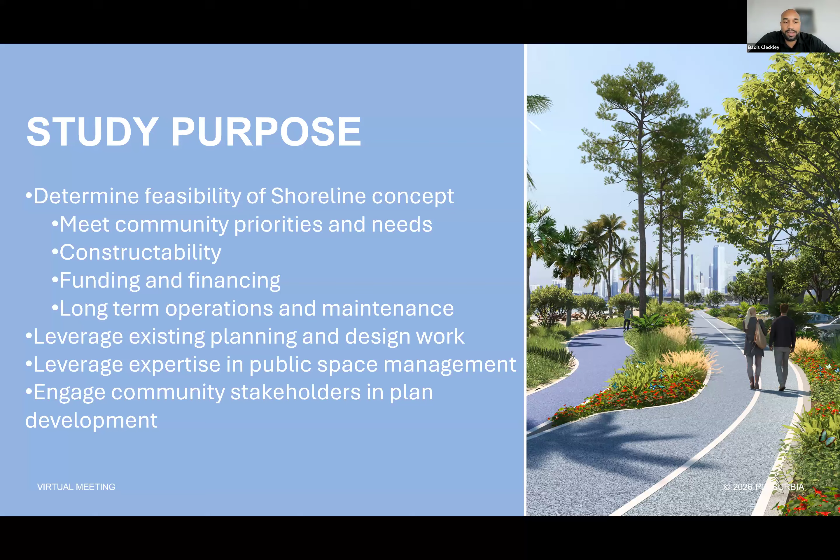And then there's been a lot of work that has been conducted to this point. Miami-Dade County, the Department of Transportation and Public Works has done a lot of analysis and corridor planning and design. And as we move forward, we want to leverage the previous work that has happened in the past and ensure that we really develop a robust, comprehensive, and impactful project for the Rickenbacker corridor that meets the desires of all of our stakeholders.

But also, this is a fantastic opportunity to ensure that we are moving cars and people in the most efficient way possible, focus on safety, mobility, access, and then also having this corridor really solve some of the resiliency challenges that we have for not only the visitors, but also the residents of Key Biscayne.

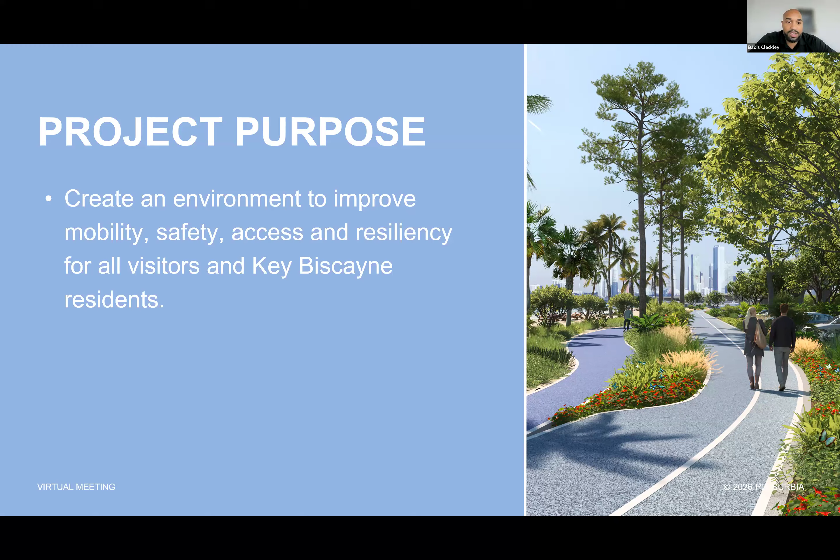Simply put, we have an opportunity through this design to figure out a better way to move people and vehicles. And one way is, as you'll see through the design, to figure out having a better direct access, a connection from the mainland to the village of Key Biscayne, and then repurpose the existing infrastructure to be able to move pedestrians and cyclists in a more efficient manner.

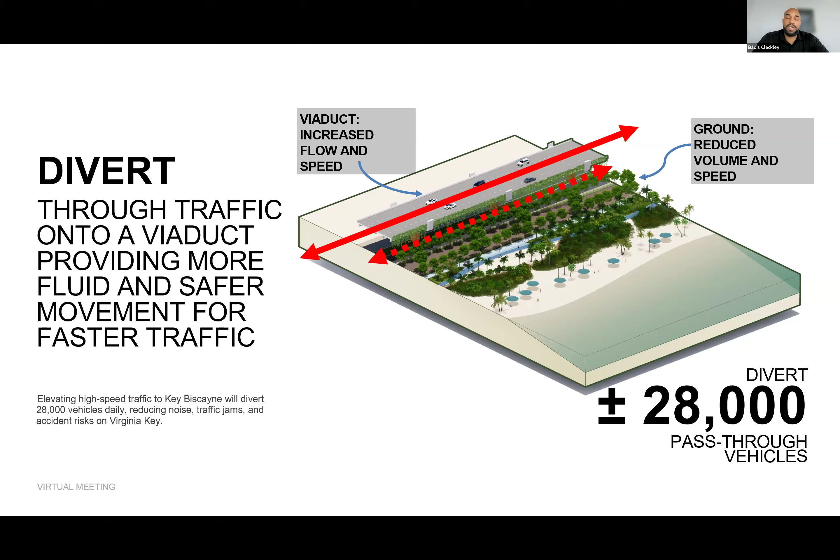At the same time providing those direct connections to future development, as well as being able to handle the traffic demand that will occur along the corridor as there's pending development for Marine Stadium, Seaquarium, and the other existing destinations that people travel to on a consistent basis. So this is a way to move traffic in a quicker and more efficient manner, but at the same time provide those pedestrian and bicycle connections.

But lastly, one of the opportunities we have is, while we're redesigning the infrastructure, to reclaim more of the beachfront and design this corridor in a manner where we can have an actual beach that is a part of the city of Miami. And that's the exciting opportunity that we have.

The beachfront will also provide pedestrian and bicycle infrastructure that will allow for not only more mobility to occur, but also safer access to these amenities as we move forward. By doing so, we anticipate having an additional 160% of public space to be reclaimed and repurposed for a higher and better use.

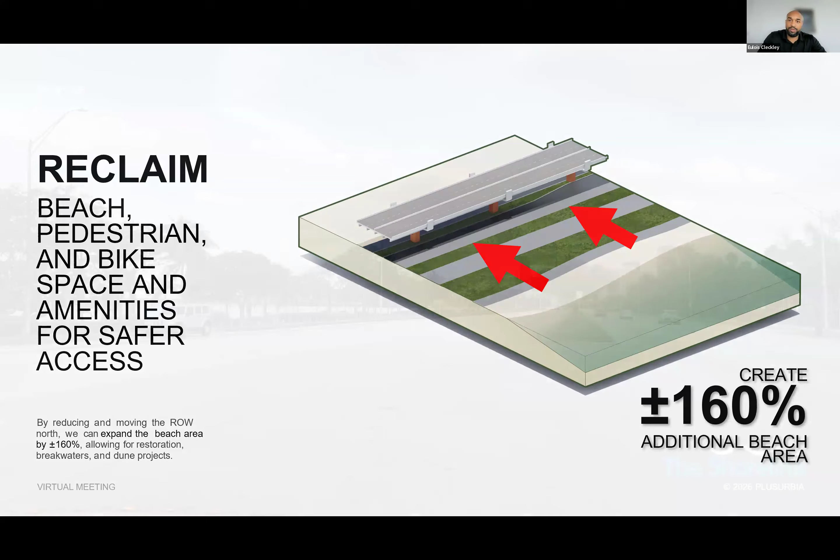So that's just a brief overview and reset of where we are and the reason why this engagement has occurred. What you'll see throughout the remainder of the slides is an update about the information that we've been able to glean from some of the technical evaluations and data collection at this point, and how that's being fed into future design for not only the Rickenbacker, but also providing those direct connections to other destinations, as well as the connection points to existing and future bridges that are being contemplated by the county to be redeveloped. So that being said, I will turn it over at this point to Javier Manso from HDR, who will go through some of the high-level aspects of what we learned through our technical assessment report.

Thank you, Eulois. The one thing we want to cover now is to go over the technical assessment that we've done so far, more of a high-level evaluation of data that we have been able to document, existing data collection, and then some of the constraints that we have identified from an engineering perspective. Next slide.

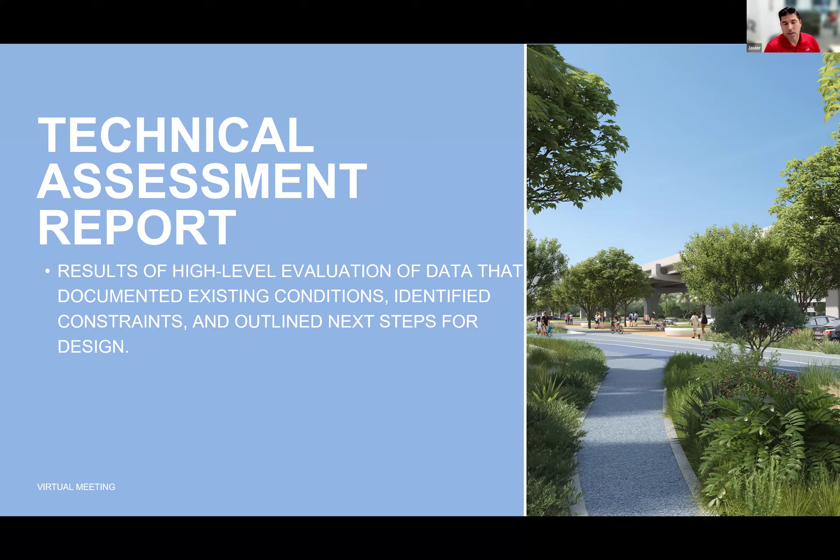One of the key things we looked at is existing infrastructure along the corridor, including a large-diameter 102-inch sewer line that comes from Miami under the bay, crosses Virginia Key, and goes all the way up to the water treatment plant. That large sewer line cannot be relocated and will be a backbone of the concepts we've been developing, to make sure we don't impact or conflict with that pipe.

Looking at traffic, this is the sole access to Key Biscayne and a critical emergency evacuation route. During special events, there are traffic spikes getting to and from the Key that reduce travel speeds to destinations like Marine Stadium, Seaquarium, and Crandon Park Marina.

There are two main bridges within our project limits. The Powell Bridge on the west side will not be impacted. The Bear Cut Bridge on the east side is currently being studied by the county for replacement, and we've been working with the county to make sure the concept we're developing is compatible with that bridge replacement.

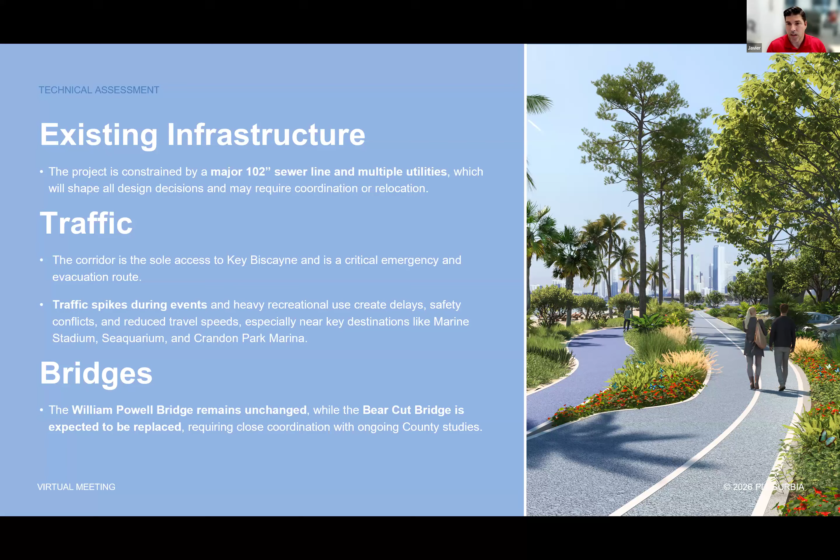Drainage is also going to be a key component. This is a highly regulated coastal environmental area, so permitting and identifying the required permits for this type of project is important, and that's what we'll work on at the next stage. The proposed improvements, as Eulois presented, try to identify opportunities to reduce the impervious area.

This allows us to consider the Virginia Key beach and coastal conditions, taking into account long-term erosion and sea level rise, and how we can make this part of the corridor as resilient as possible through beach restoration and reclaiming and removing paved asphalt areas.

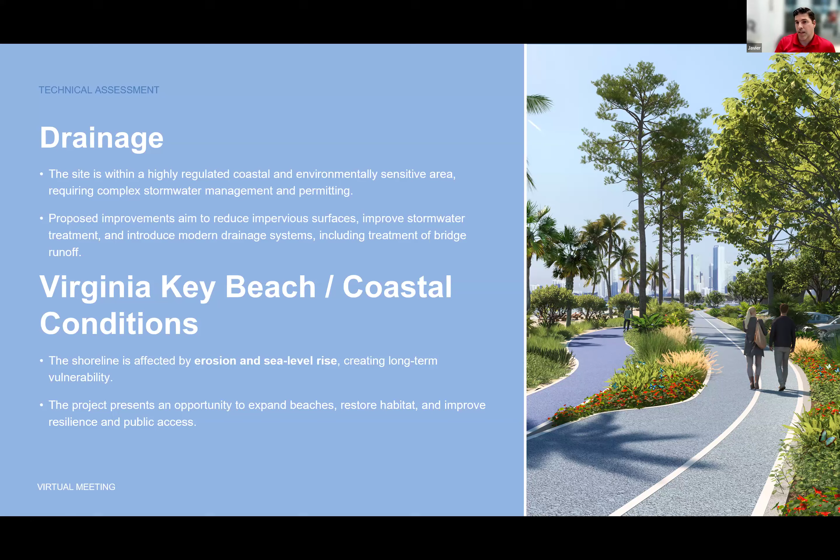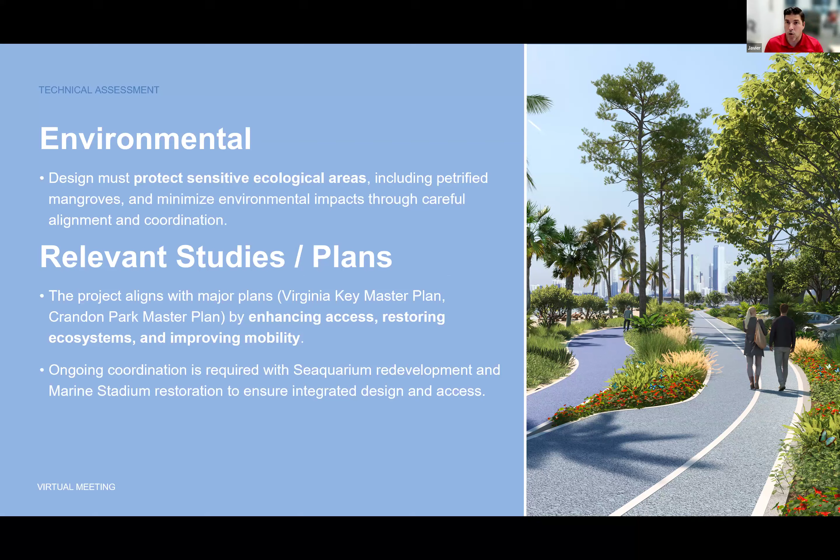On the environmental side, this is a very sensitive ecological area. There are petrified mangroves in Crandon Park that we cannot impact. Some of this is being coordinated with Miami-Dade County, who have identified sensitive areas as part of the Bear Cut Bridge replacement, and we want to stay in sync with their findings as we develop our concept. There are also the Virginia Key Master Plan and the Crandon Park Master Plan, and we're trying to maintain cohesive, in-sync development across all the different ongoing studies along this corridor.

From an initial technical design standpoint, one of the key components we're working on is the Bear Cut Bridge replacement. That's in very early, preliminary environmental study stages by the county, and we're coming in with a concept that is compatible and allows for future development between the two different studies.

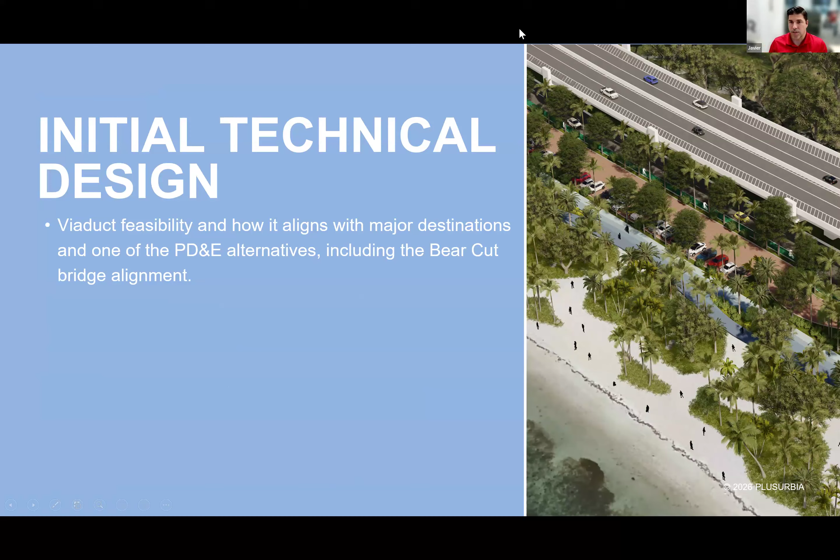I'm going to share my screen and walk you through a concept roll plot that we have developed.

What you see on the screen are two panels. The top panel is what we call the upper roadway, where the viaduct will be located on the corridor, and the bottom panel is the lower roadway, where we turn off the viaduct and can see what the improvements look like at street level.

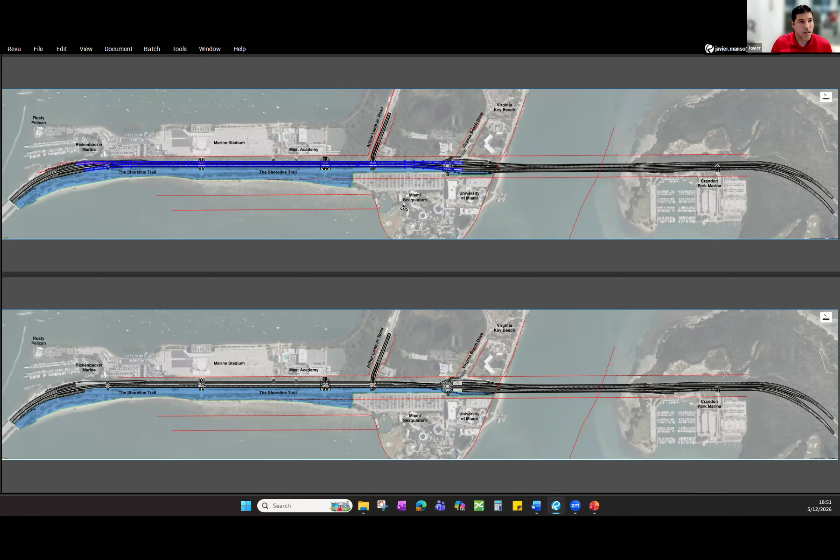Looking from left to right, the Powell Bridge is on the left, and as we move east we're heading towards Crandon Park, with Crandon Park Marina all the way on the right. Key destinations include the Rusty Pelican, Rickenbacker Marina, Marine Stadium, Mast Academy, Arthur Lamb Jr. Road, the Miami Seaquarium, which might be in redevelopment, the University of Miami campus, and Virginia Beach Drive.

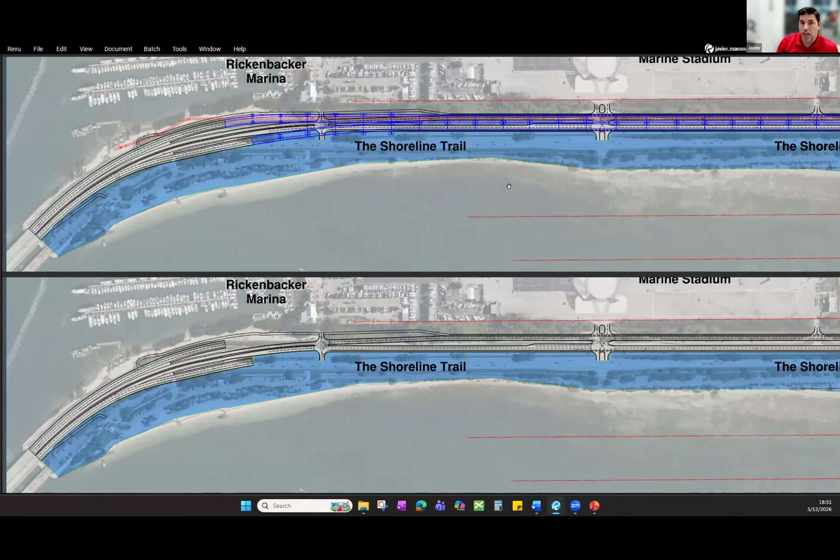As we zoom into the concept, the blue shaded area is what we call the Shoreline Trail, an opportunity for the transformation of the Key based on this concept. One key element was separating the traffic: as you're coming from or going to the Powell Bridge, for the safety of pedestrians and bicyclists, we propose separating bikes and peds on the right side, where they'll peel off on a ramp into the shoreline or come in from the opposite direction.

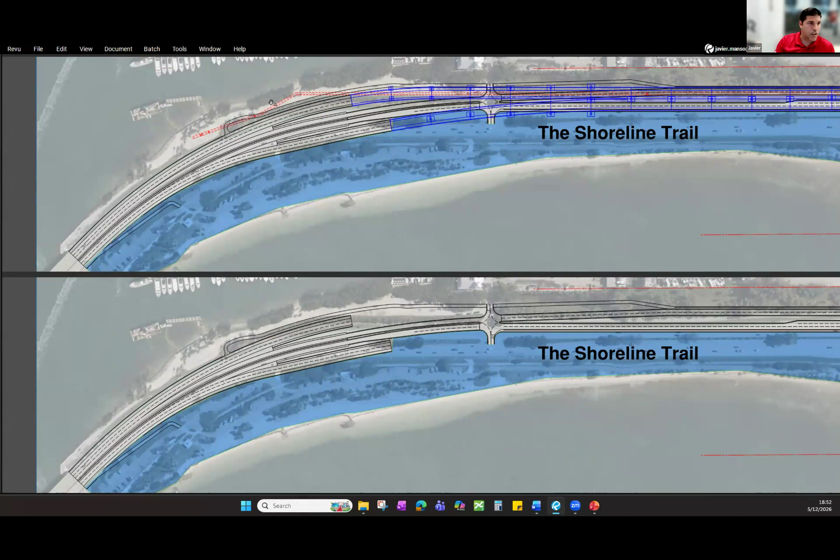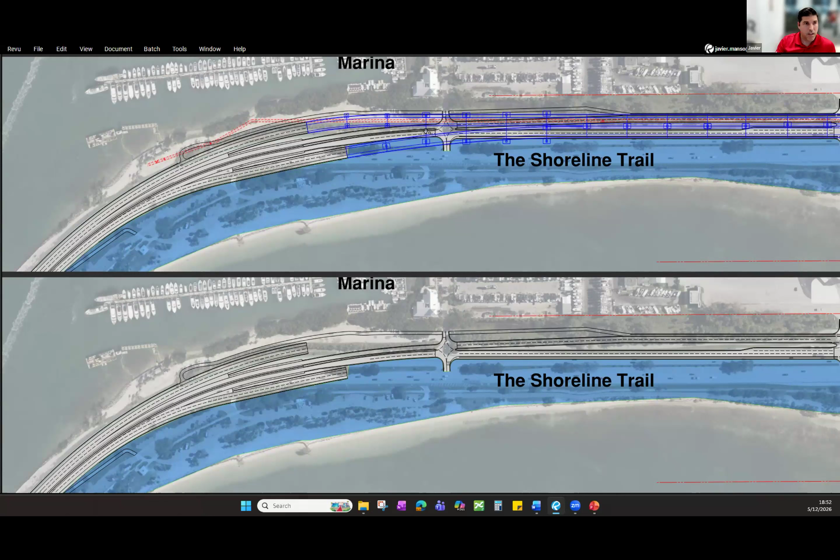Vehicles that would like to go to Virginia Key will go in on the left-hand side, get on and off, and then go to the local road. If you want to continue all the way to Key Biscayne, you continue on the outside on the viaduct above. If we zoom in on the bottom, you can see the lower roadway, and the blue outline on the top panel is the viaduct.

Right now we're showing a preliminary location of piers and columns, so we can identify potential conflicts and design around them. We've also identified the large diameter pipe, a 102-inch sewer pipe shown in red dotted, and we're currently working with the county to verify and locate it exactly so we can design the foundations for the viaduct without impacting or conflicting with it.

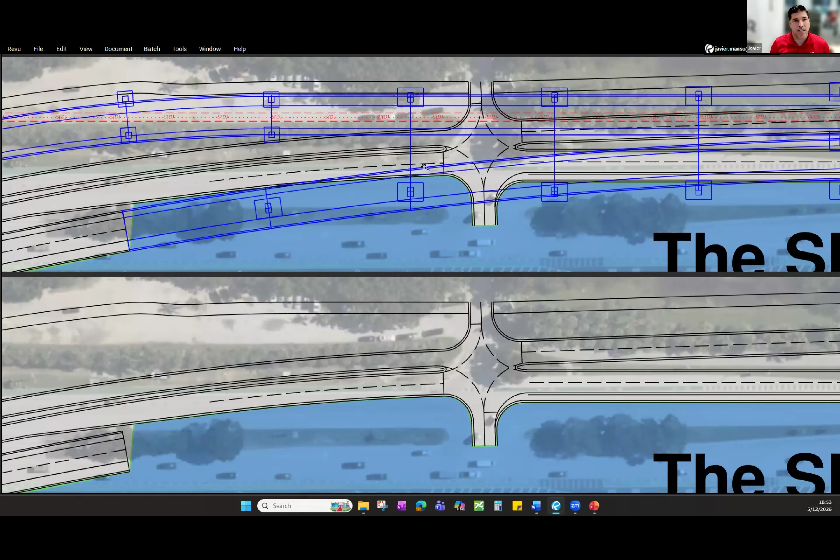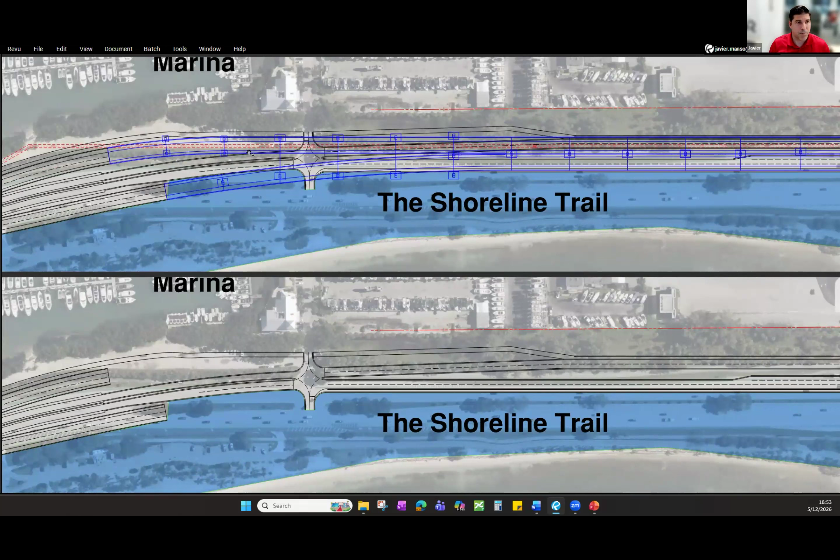As we move forward, the typical section of the road below will become a 4-lane curb and gutter roadway, low speed, 30 miles an hour. The viaduct above will continue the same speed as the Powell Bridge, posted at 45 miles per hour.

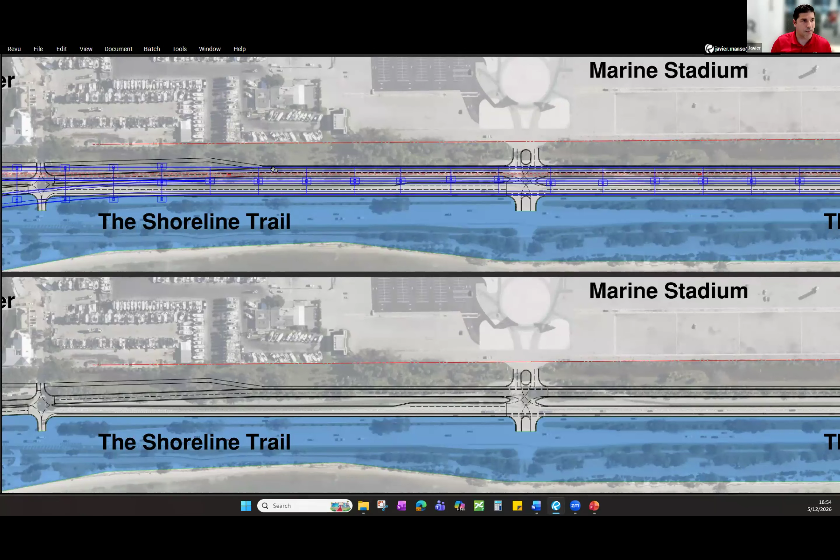As we continue on, at the Marine Stadium there will be a full intersection. The type of intersection and access control has not been fully determined—that can be decided in a later phase of the study, whether it's signalized or non-signalized. That's ongoing coordination with the county. However, the viaduct above would not be in conflict with the Marine Stadium access.

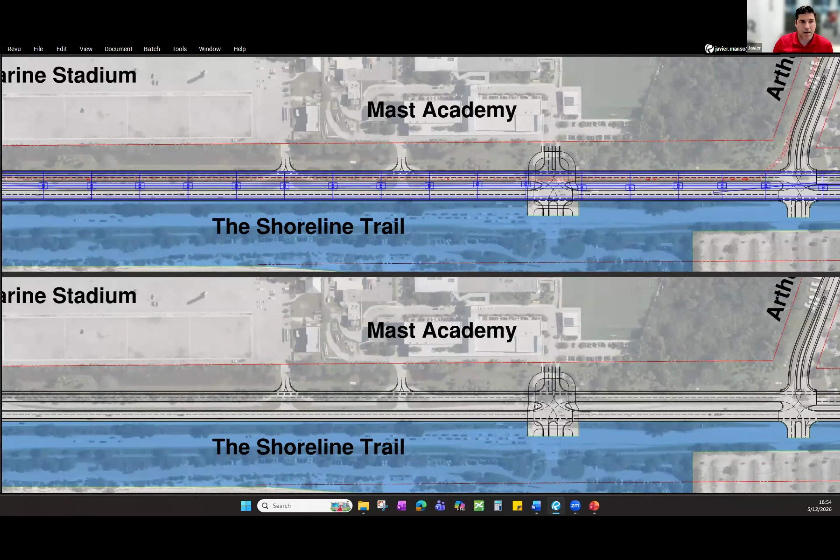So we continue moving east. The same thing with Mast Academy: the viaduct will continue to go over, and the local road will provide access to and from Mast Academy and any potential parking in the area of the Shoreline Trail.

One key component of the Mast Academy discussions with the county is the safety of the students during drop-off and pick-up, making sure we've identified the shortest intersection so students parking on the Shoreline side have a very short crossing distance, with ample, very wide crosswalks so they can cross safely.

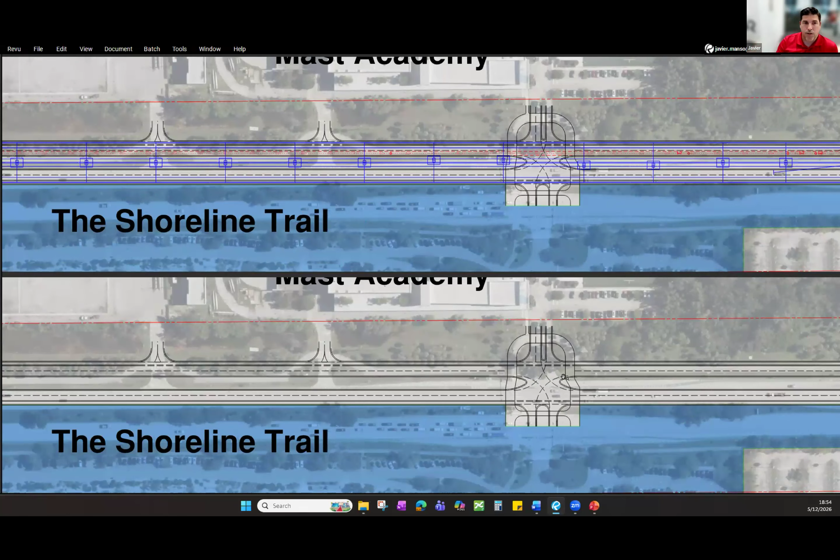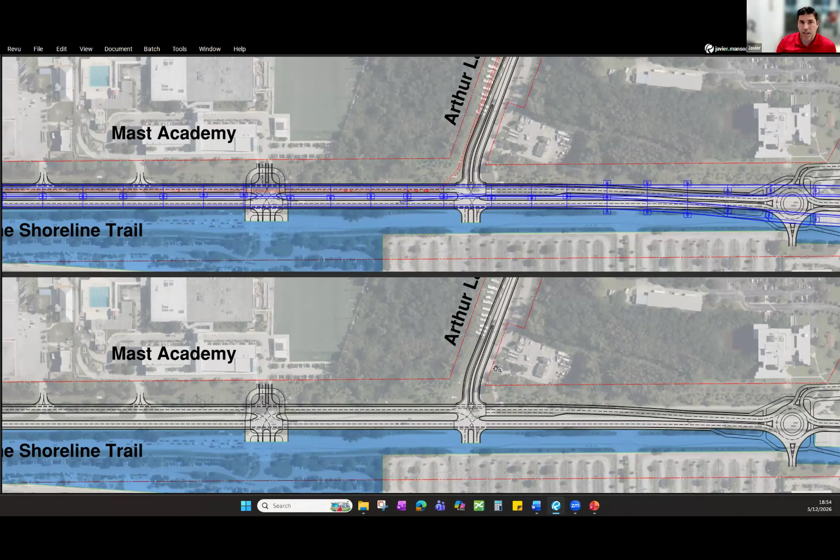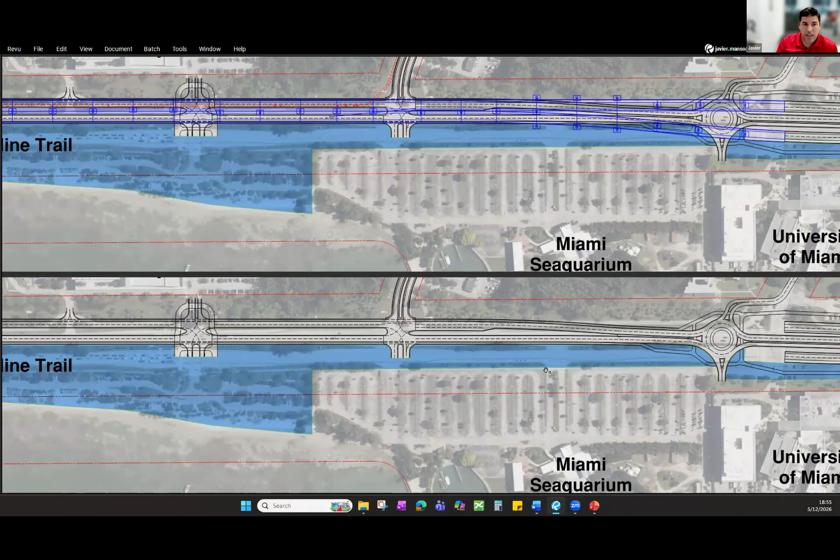Continuing on, at Arthur Lamb, the entrance to the park, the beach, and the mountain bike trails would be reconfigured, introducing additional access to what could be a redevelopment of the Seaquarium property. One key component is making sure all the parking at the Seaquarium is maintained as much as possible—we're trying to stay away from it so it can be maximized for the use of the corridor.

Looking at the top, the location of the potential columns for the viaduct is being designed and positioned so that we're not impacting the parking of the Seaquarium property.

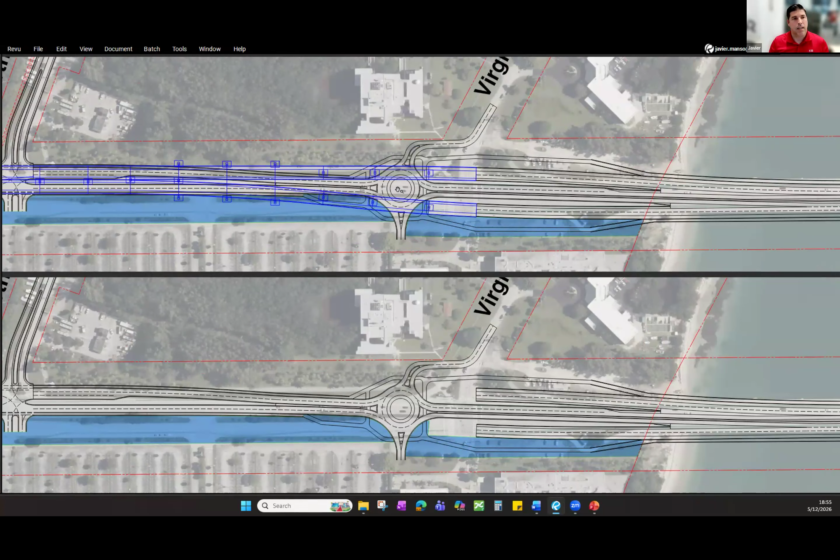As we get closer to Virginia Beach Drive, we do need to relocate that intersection. Right now we're showing it as a roundabout, but it still needs to be fully vetted whether it stays as a roundabout or becomes a full signalized intersection—that is still to be determined.

One key thing here, as we get to the Bear Cut Bridge, is the same approach as on the Powell area: the local road access will come in the middle of the Bear Cut Bridge, and pedestrians and bikes will connect to the outside, eliminating the friction between pedestrians and bikes, just as we did on the Powell Bridge.

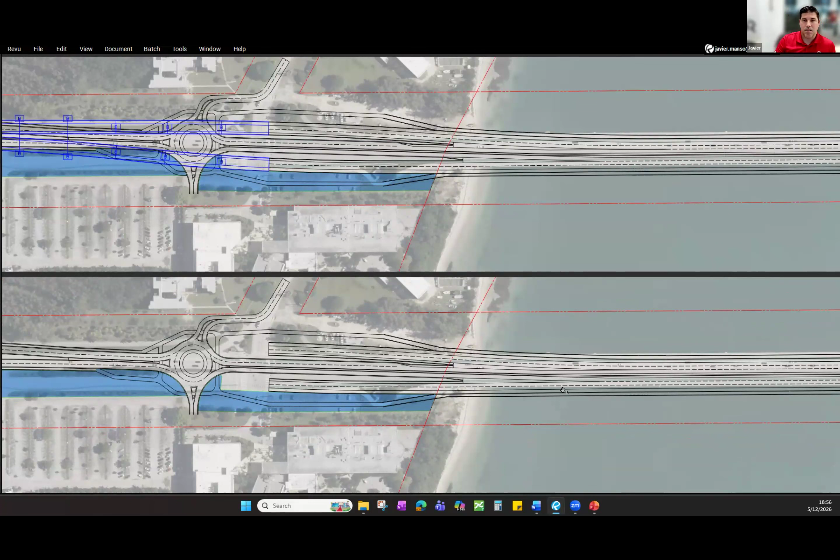The typical section and the limits of the Bear Cut Bridge are still being studied and coordinated with the county to minimize throwaway and maximize compatibility between the two projects, depending on which one comes in first.

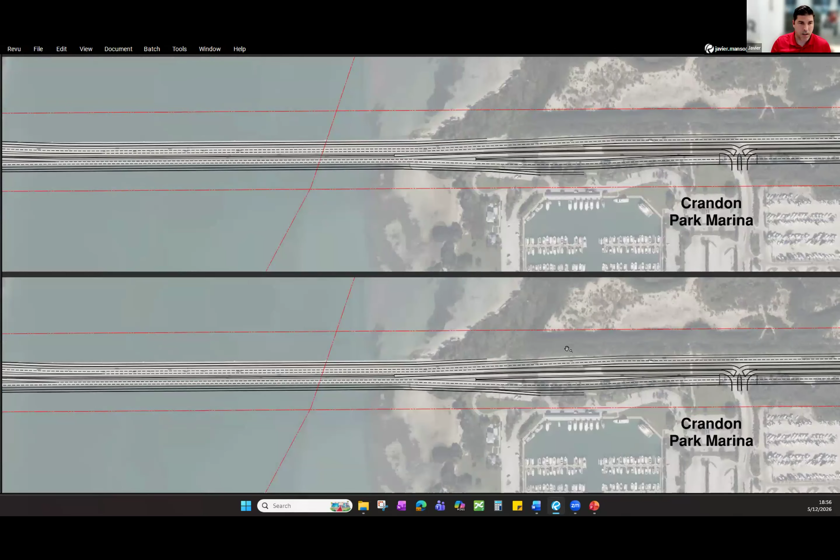As we cut across the Bear Cut, as we said earlier, there is environmental and sensitive land—the Crandon Park master plan area has some petrified mangroves that are protected. So we are maintaining the same limits as the existing bridge on the north side to minimize any impacts to the mangroves.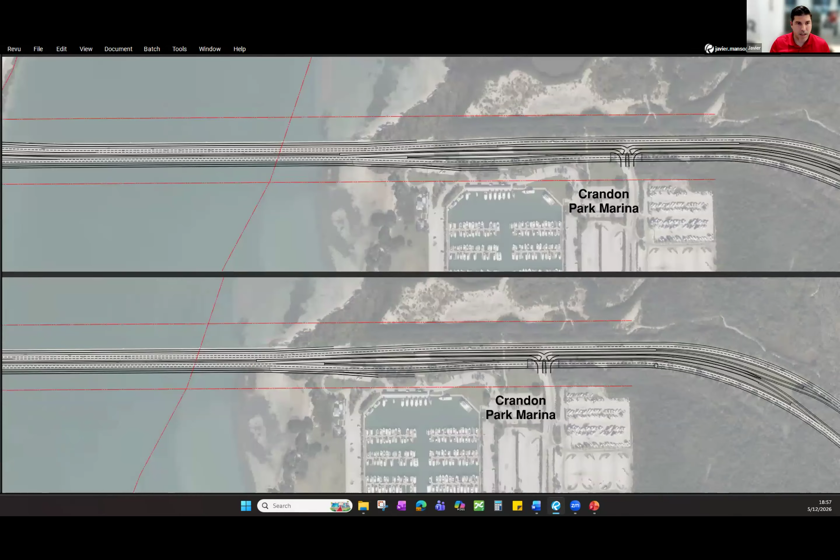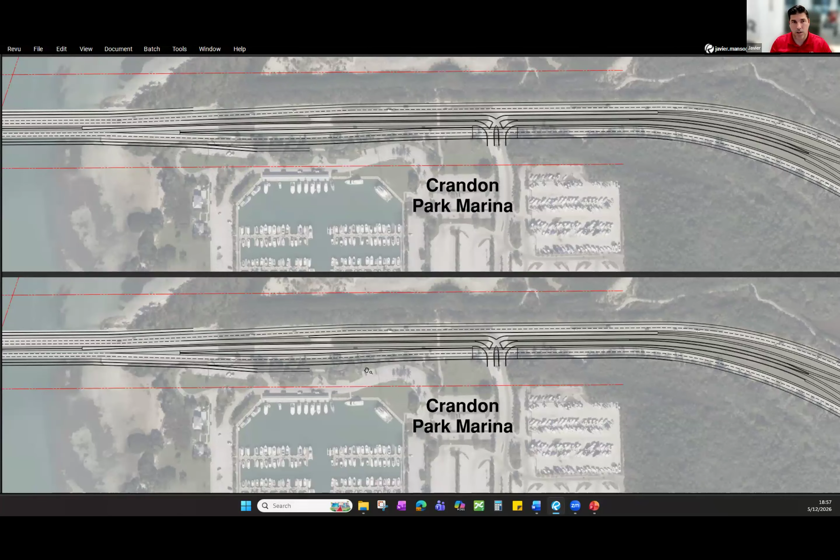At the Crandon Park Marina, what we're currently showing is sort of a bypass. Depending on what access is desired into and from the park or the marina, there could be a bypass coming from Key Biscayne to Miami or from Miami to Key Biscayne, to maximize throughput while minimizing conflict between pedestrians, bikes, and cars. And that's all I have.

All right, thank you, Javier.

Now, at this point in time, I'm going to turn it over to Juan, who will provide more detail with respect to the shoreline area and the use of the public space areas being contemplated as part of this design. So pull this up here and turn it over to Juan.

Thanks, Ulyss. One of the great results of this project is that we are increasing the amount of open space we can get in this key. As you can see, I've highlighted the area Javier hasn't shown you, just below the new roadway pattern he was telling us about. The proposed area, as working numbers since we're still shifting lines here and there, will be about 28 acres.

So it's plus or minus, but roughly that's the number we're looking at, and it'll go all the way from the Powell Bridge over to the Seaquarium. Hit next. Next slide, please.

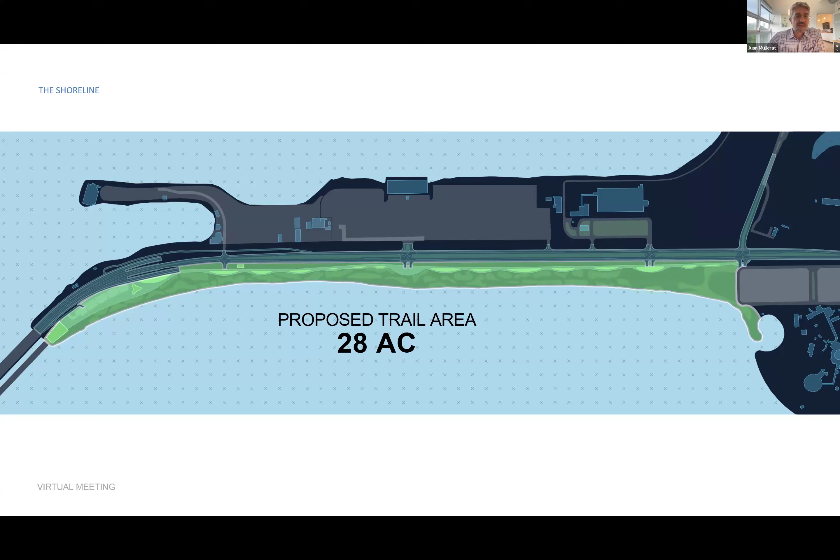Just as a point of comparison, the current area devoted to beach area is 11 acres, so we are more than doubling the amount of area we will have. The way we're measuring this, in case anybody has a question, we are not increasing or expanding the beach line. We are just comparing apples to apples right now.

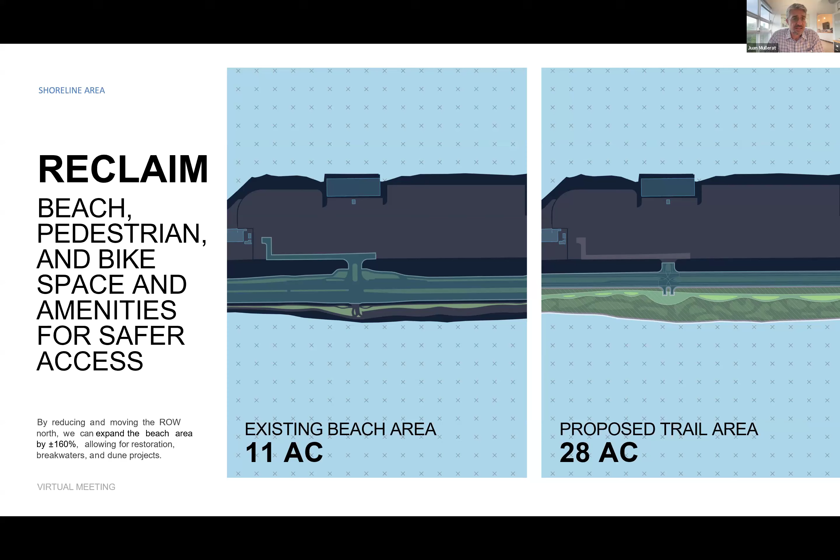And if you hit next, I'll tell you how we get these numbers. In essence, we are extending the depth for this trail and this area for amenities because we're gaining a significant amount of land that we're reclaiming from the current asphalt.

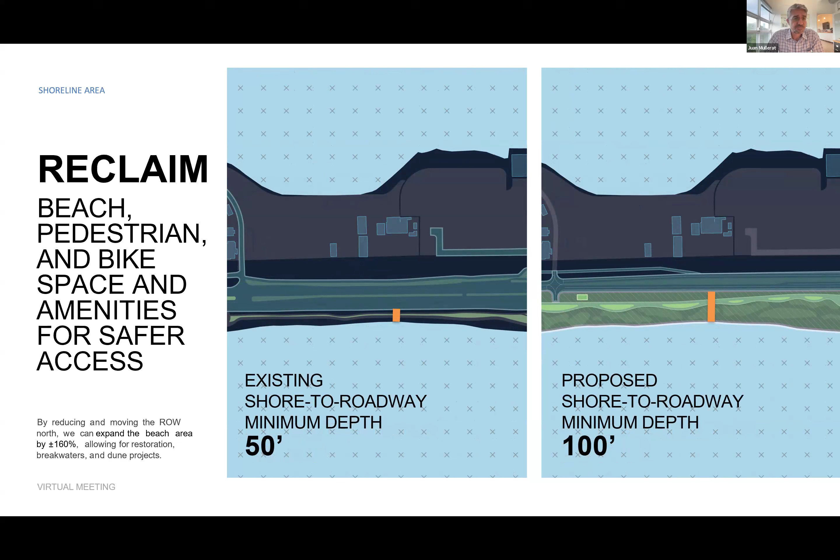Hit next. With that amount of depth, which varies — in some places more, some less, depending on where the waterfront is — we are reclaiming 9.3 acres, which is devoted to amenities, the trail, and in general permeable surfaces that will allow us to take care of a lot of the stormwater generated in this stretch of the key. Hit next.

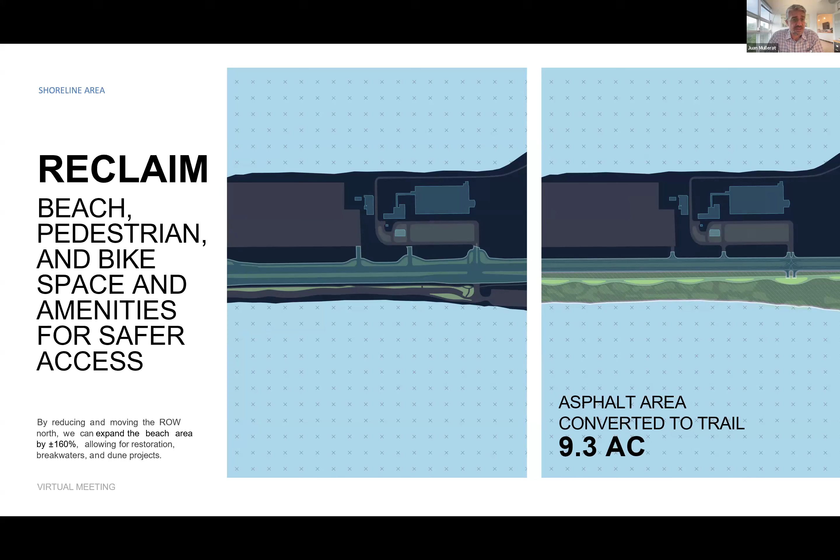So what are we going to do with all this additional land that we have? The current idea we're working with is to create several tiers of amenity space. The entire thing will work together seamlessly, but there will be some potential points of interest we're going to highlight.

The first tier could be open space areas for food trucks, playgrounds, courts, etc. Bear in mind we're also including a number of spaces where natural dunes will be included, and that will also help us with resiliency and our ability to weather storm events and storm surge.

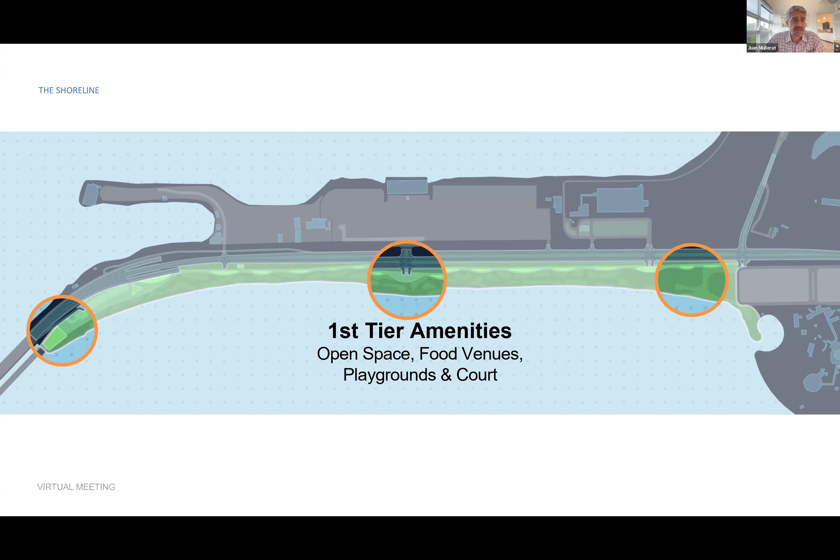Go to the next one. Between these first tier amenities, which we've spread out on either edge and in the center, which happens to be where the Marine Stadium is, we will also provide some second tier amenities, which could be kiosks or recreational rentals, very similar to what the county currently has in other parks where they have their shelters.

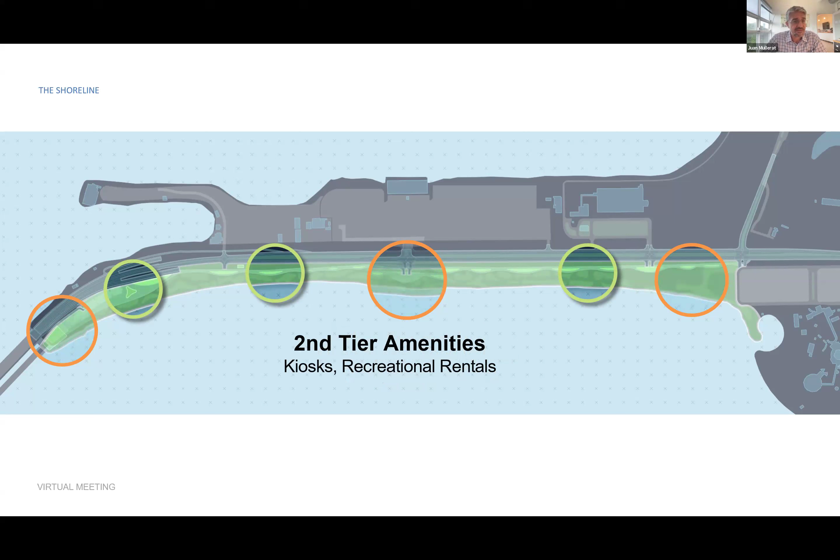Hit next. In between, that's where we would add amenities one could enjoy — bike stations, bike repair stations, many things you can see today in the Underline — that help provide useful stopping points for the different modes of biking and walking and using this area. So for beachgoers, bikers, and people with kids enjoying the open space, there would be a number of amenities included in the plan.

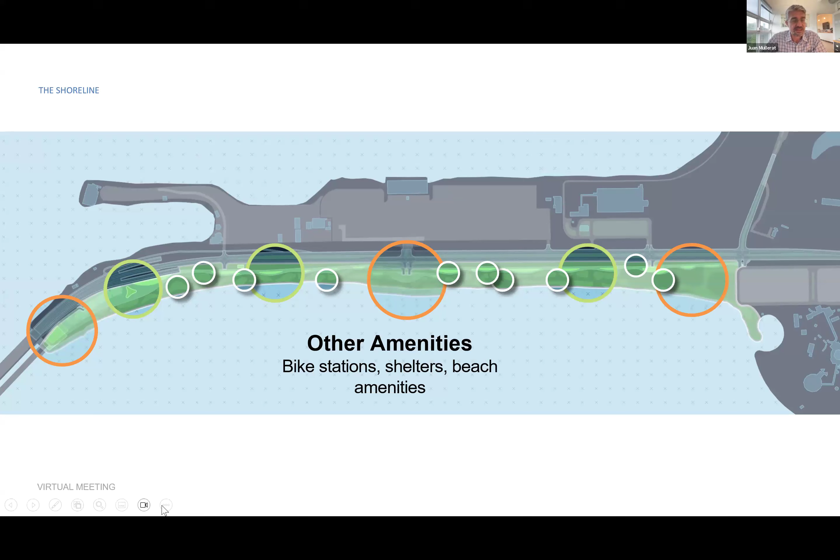Hit next. Ultimately, to recap, we are proposing a trail of 28 acres compared to the 11 acres we have today, achieved by increasing the amount of permeable material on this stretch of the causeway. The entire stretch will be protected by beach dunes close to the beach — just after the beach, you'll have these beach dunes, which we will install by reclaiming the asphalt space — and then a multimodal path.

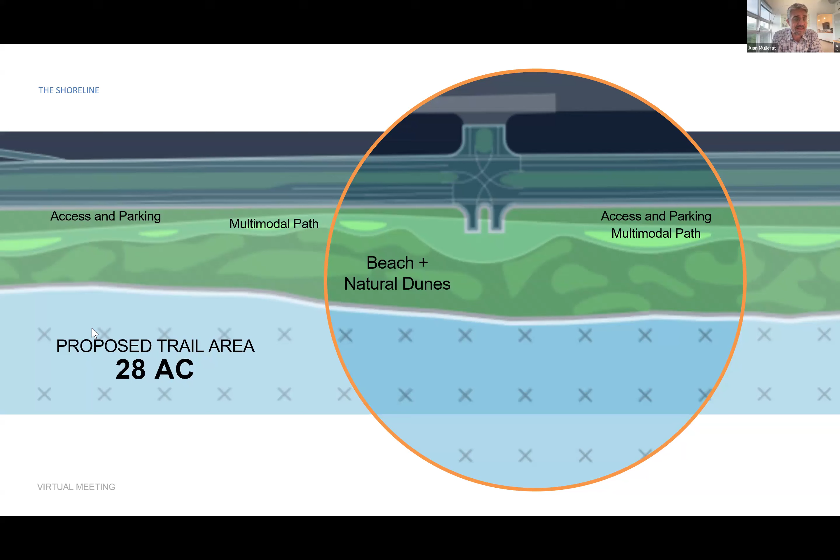This path will become a leisure mobility option for pedestrians and low speed bikes, again similar to the Underline. We will provide parking right up to the bike lane that Javier was showing in his right of way. We will continue to develop this as we move forward with the team and with your input.

Thanks, Juan. So that concludes the content of what we wanted to share with you all today. Just a couple of points of note.

We continue to work well with our stakeholders at the county, as well as our municipal stakeholders from the City of Miami and the elected officials there that represent the city, and of course with our partners at the Village of Key Biscayne, Steve Williamson and his team, as well as the Village Council. We continue to ensure that we are providing opportunities to give feedback on the design of this project. As we move forward toward finalizing the next phases of the study, there will be an opportunity to have an in-person meeting with the general public.

We anticipate having those meetings sometime over the summer, with the intent of wrapping up this study by late fall. So we're on track. We appreciate all of the support, and we appreciate your time tonight for listening through our presentation.